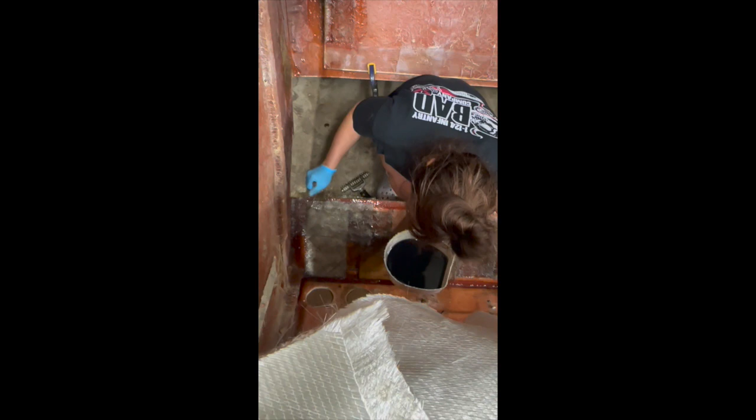Fiberglassing the back of the console where the electronics go. The inside? The back? That's where the electronics are going to go. Yeah, the inside. Yes, the inside. Came out pretty good. The whole thing's coming out pretty good, actually.

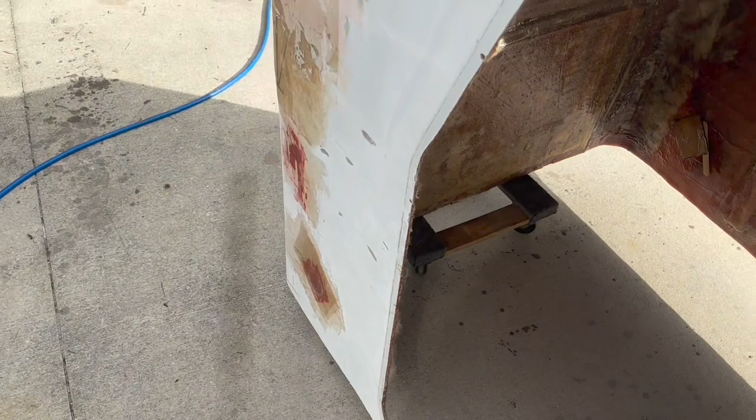Well, what we're gonna actually do is we're gonna do all this white piece here, and we're gonna put gel coat on it and everything that's flat. So like this stuff here is flat and all this other stuff. So we're gonna go ahead and make that. Then we're gonna get that gel nice and thick on this center strip here, and on this stuff, giving us our first coat.

Once we get the first coat all over the whole thing, real thick, we use a thing called a gel coat gauge, which will give us the mils. Never seen one. This is one that U.S. Composites sells. The same people that do the dump gun. So basically, how that works is you just put the gel on. There we go. Put the gel on, and then you put this so you get low. And I'll show you guys when I do it.

But you can kind of see the mils on there, and then you can see how it's stepped. Once it gets gel on it, that will tell you how thick it is. We are going to try to put a thick coat, probably 10 to 15 on there, maybe 20, because when we sand this thing, I want to sand it once and done, and then fix the imperfections. The only thing I'm really worried about is back here.

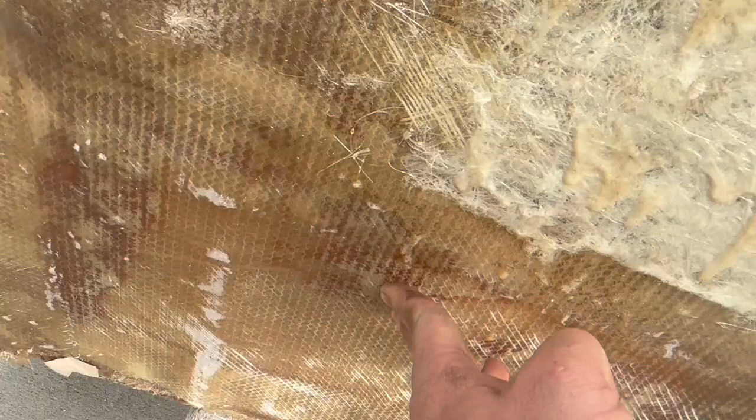I can already tell this is going to be a soft spot here when they try to build that up. We may not gel this piece. There's a flex in it right here. I fixed it up here, so I'm going to have to cut another hole right here like I did before. Fill this with resin to get it stiffened. And then I want these radiuses to be built up like the other one.

So, don't know what I'm going to do with this. I might flip it over when I sand the inside, because we're going to finish the inside of the console as well. Get it sanded, my popsicle sticks cleaned up, and some of that goo cleaned up there, but just get it sanded and prepped, because once I finish the inside and put the electronics and all the wiring on, it's gonna look great, and I want it to really stand out and be like a finished product versus this.

It had the carpeting on there before, so may throw a few stiffeners in right here. This is pretty stiff, but I don't know. We're definitely probably gonna stiffen things up. This is stiff. This air bubble here probably needs to be cut out, but I'm not really worried about any of this. This is actually very solid. Once I glass it to the boat, we'll be pretty good, I think. There's tons of glass on it, tons of 1708. Even though there's air bubbles, it's all here pretty good.

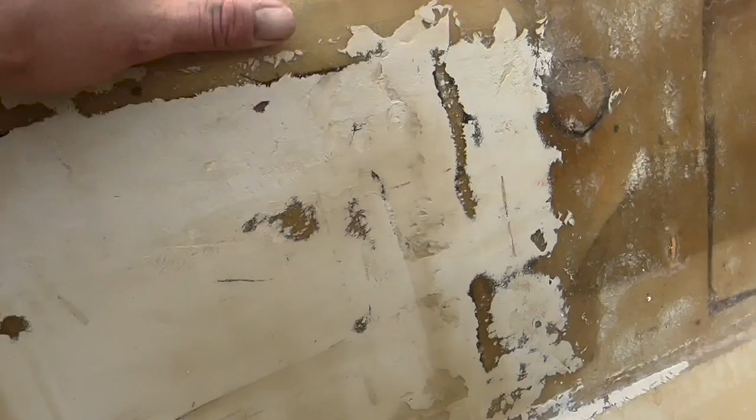We had some bad layups, some old glass that we started using, which I wanted to get used on the console versus the boat anyway, so. It came out very good, I think, actually. I'm pretty happy with the smorgasbord of different pieces that we've put together, and actually made a console that's much different. So I'm super excited to get it all put together. So with that, I'm going to mix this putty up, and we'll go from there.

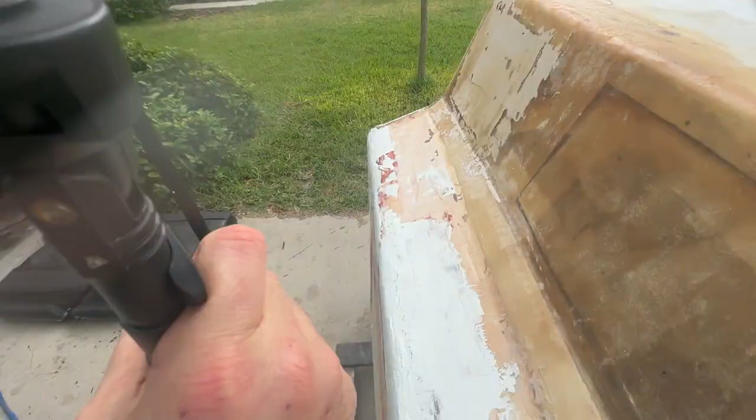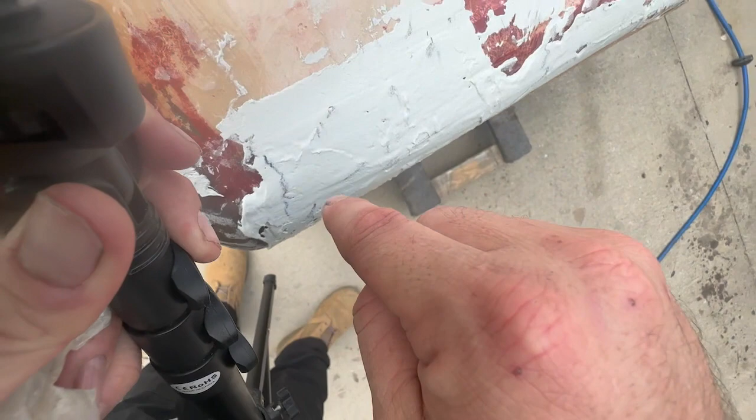So you guys can kind of see it. This fairing compound is fantastical. I mean, it has built all this up already. You can see where the big spatula misses. What I'll do is I'll get some more fairing compound and bring it this way along that, come down, and then I'll be able to make these fillets, which is what this thing is. So you can kind of see how it built it up nice, or there are big ruts in here. We'll get this done, and then we'll get it going.

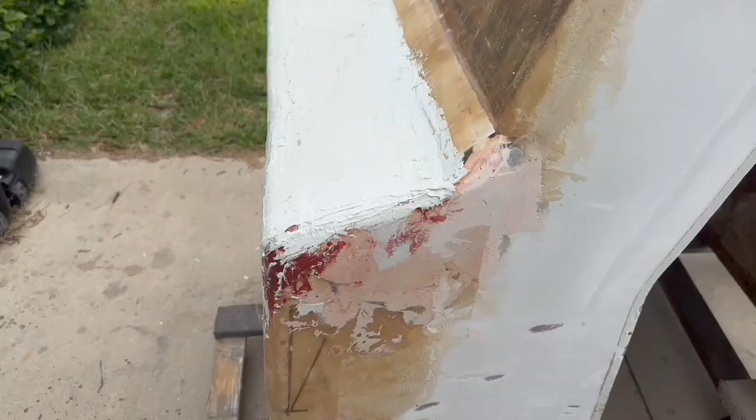See how easy this stuff kicks. I'm gonna fill this side because you can kind of see the divot, and it's not perfectly round. So I'm gonna round this corner. At the same time, if you look down, there we go. You can see the dip right here, and another one right here. The other stuff looks like I filled in really nice. This came in good, but you can see there's a flat spot here, which I probably could shave down and get it to where I want it.

You can kind of see it better from this angle, the flat spot right here. So I'm gonna build that up a little bit more around that corner because you can kind of feel it. And then sand all this stuff smooth. Not smooth, but with 80-ish. Get away from the 36, 40s. And then we are going to paint gel coat on it. Excited. There she is. It's time to get to work.

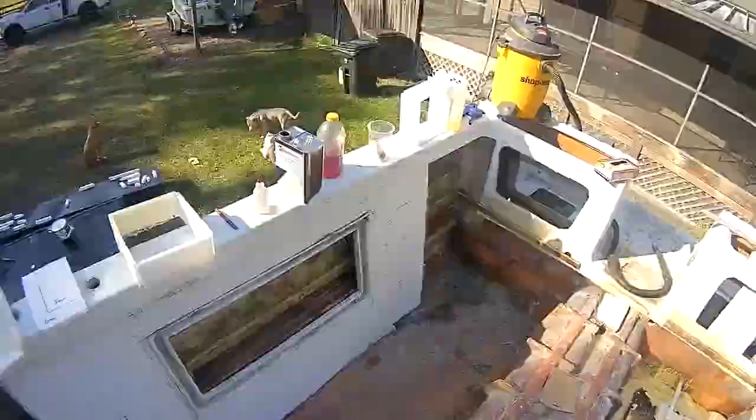All right, so here's what we got going on now. Today, I have patched the tank. I patched this tank right here, where my son dropped it. So we've gotten pretty far. The main goal today, because it's the only day that the sun's out and it's probably gonna rain tomorrow, was to get the foam in. And we've actually done that. So I think I'm almost there.

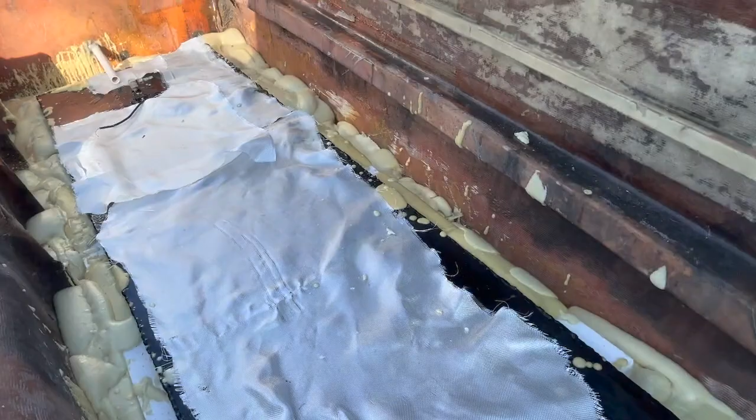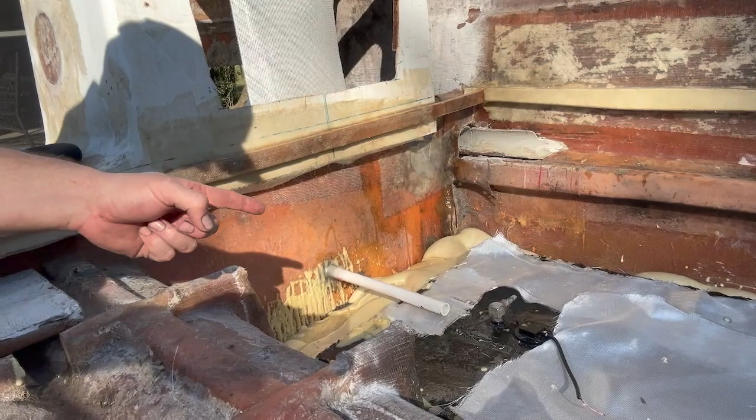It's all got to be about that high right there, which it will be hopefully when this expands a little bit more. I might have to do one more cup just to get it all the way up to the top. What I've done is I installed the drain. So this right here is the drain. And that is going to be for the box that goes over these right here. So we'll get that stuff in there.

Today, before I leave, it's only whatever time it is, but it's winter time. So before I leave today, I definitely want to get the glass down. I'd love to get this thing kicking for tomorrow, to where the next stage on this side of the boat is nothing but boxes, fish boxes, and then floor pieces. So that would be a phenomenal thing if we get that done.

But it all goes down to getting the foam in today and then getting these pieces of glass laid on there. And then we'll move on to the little stuff. Everything's time-consuming, but this is pretty time-consuming to the point where I have to get the stuff put in there and let it dry, and then kick it, and then dry it, and then build upon. So it's going to be built in layers. We're just gonna go from there.

I'm doing one side of the boat, so if I mess one thing up on one side, I can correct it on the other side. That way I don't have to correct twice, just correct once. But I think that we got a good solid plan here today, and it's gonna work out.

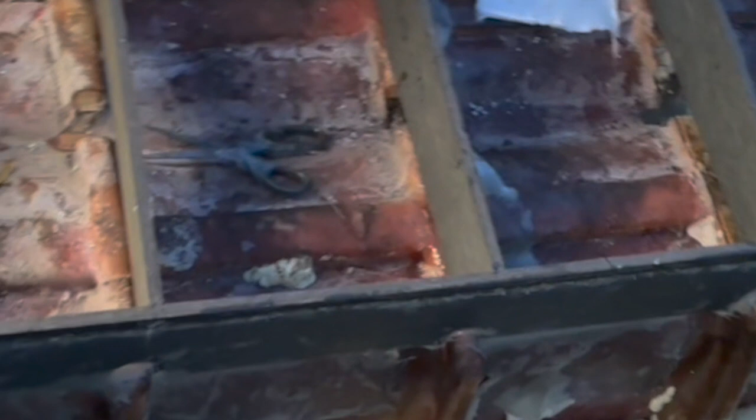But I pretty much have these stringers put in. I did a huge layup on this side of the boat, all the way down that stringer. It's really hard to do these big layups by yourself, so I've got that one put in, that one, and all those ones put in, tabbed in. So as soon as they all harden, it's not raining and I can move this tarp, we'll be able to do the rest of the glass work, because the big layups with 900 mils of resin just kill you under this tarp. The face is burning, I got to get out.

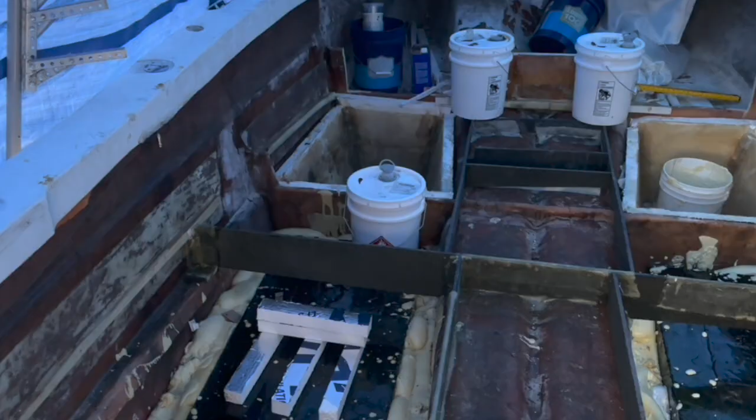So yeah, that's pretty much where we're at. We have gallons of resin left to do the floor. I'm going to add one more set of stringers here and here. They go all the way across, and then that should take care of everything from there. I may add one stringer right here and right here with the bulkhead. So I'm gonna add a bulkhead here, and maybe a stringer here and here, dividing that into two hatches, which I'll have access to via another recessed thing.

So we'll see. I got a lot more to do. It's all evolving as I go through. Like my buddy Joe says, definitely not gonna have this thing done by February. So just rolling along. We'll see how it goes.

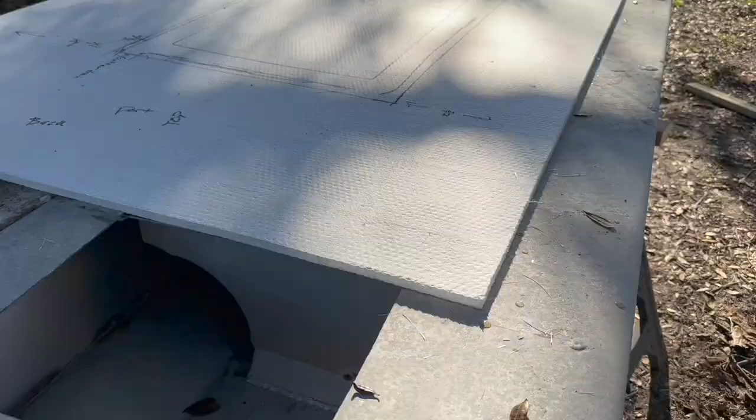Signing off. So here I went ahead and drew that hatch out that I put over there. I'm going to trim up. So that one, I went and drew it out. And here's kind of how I'm thinking I'm going to do this. So I've marked this panel as the back port side. So the front of the panel is going to be here. This is the top port side.

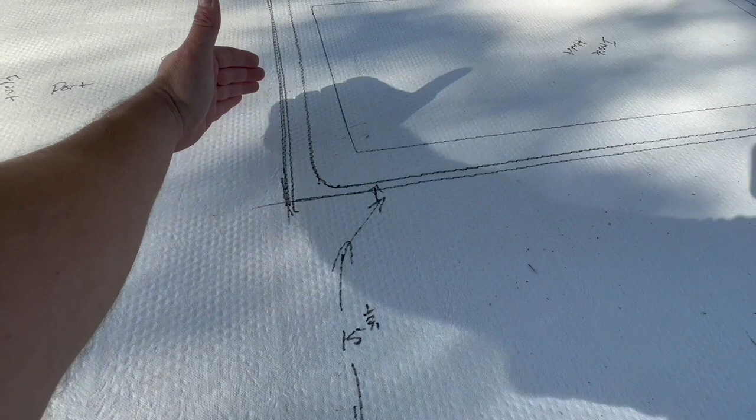The measurement from the hatch to the side of the boat is going to be 15.5. So the hatch is going to be sitting more to the center of the boat. From that side, it's 10.5 inches. I didn't center it because I wanted it more to the side. So when you walk around, this is open and flat.

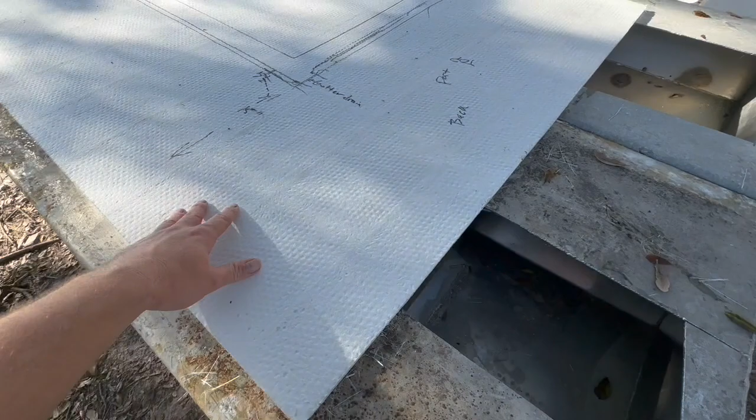Gutters here, which I probably am eliminating the gutter, but I don't remember if I'm going to do that or not, because then I have to cut this out and make a gutter going all the way back to the back of the boat. What I think I want is for the hatch to sit flush with the floor, so it runs out the back, or just make its own little gutter there, and I'll glass it in the bottom, and that's where it'll go. And then the hatches will drain under the floor type deal. Don't know how that's going to work.

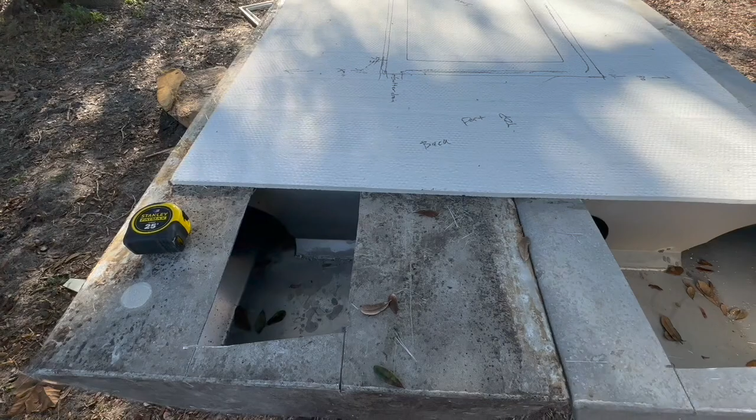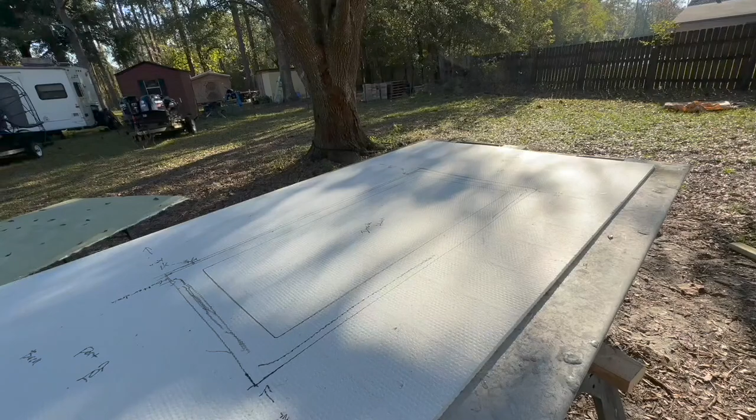And then back port top. So 10.5 inches from the center of the boat, 10.5 inches from the back of the boat, or from the side, 15.5 inches from the center console. So the panel, as the boat sits over there, the panel's actually backwards. It's going to turn this way. So we'll see how it works out.

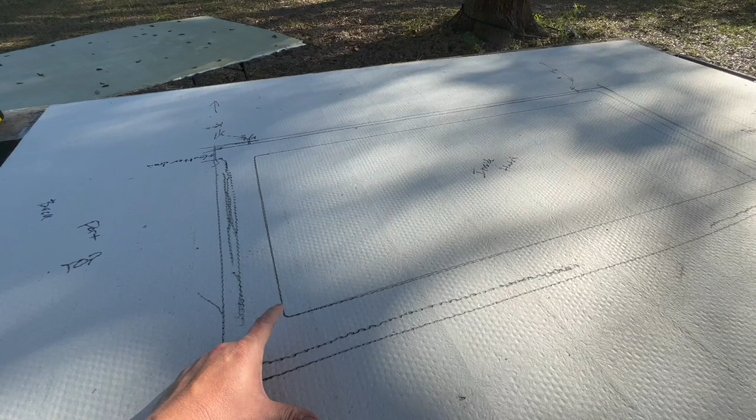What I'm going to do now is I'm going to cut this around this inner edge. So this here is the width of the gutter. And I'm going to go to the center edge here, cut this out. This is the hatch piece. So I'll make the new hatch out of that after I tear apart the old one and get the old wood out, depending on if it's composite or not. One of them is rotted and it's rotting, so I know it's gonna have to be replaced. So let me get to cutting, and hopefully I don't mess this up. I bought an extra piece just in case I did, and we'll go from there.

All right, so here's what I've done. I went ahead and cut this out, so you can see it fits out nice in there. There is a huge gap on the other side, but I'm going to cross that bridge when I come to it, since I'm reusing the hatches. And I'm not remolding hatches out of this other stuff.

So I've traced around. I'm gonna roll this into the gutter because I need this to be strong so it doesn't flex or break or anything like that. So I'm gonna cut this out. This is the inner piece. Reuse this for the hatch. I've got my other piece over there for the other hatch, like I said. And then I'm gonna wet this out and put it down, and then it'll be panel number 2 for like this. So hopefully we get this done. I'll jump in the boat. I'm gonna finish the tabbing and stuff for that, and then we'll go from there.

He's the only one who gets to use his 3D printed mixers.

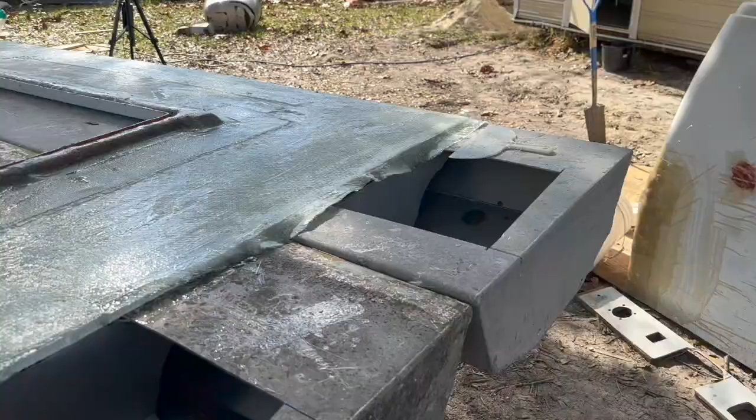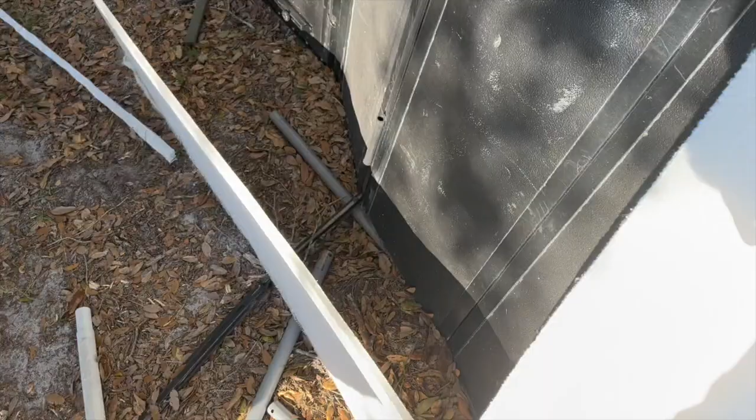So what I've done is I've measured this stiffener to here, which is about 38.5. I'm gonna cut it right on this side of it, and then I am going to stick that on this floor panel. Now the reason we've done that is because the floor panel needs to sit flush with the top of the stringers and bulkheads, and if this was too long, it would sit on top of that and it would be a big bump in it.

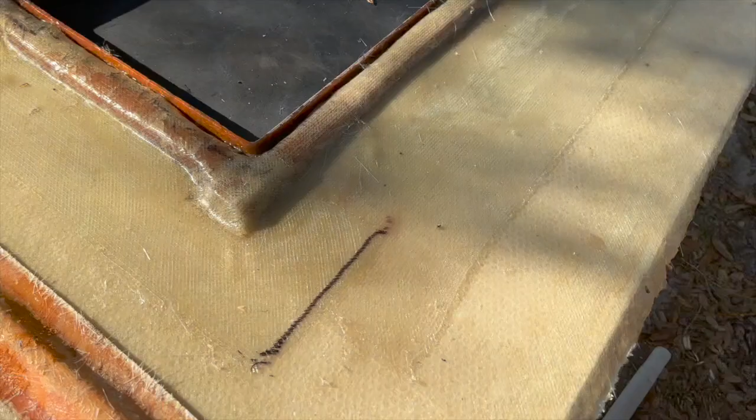So cut this down, cut that down, and then from there, I'm gonna take this, big thick panels, and I'm gonna glass it into the sides here and here, and this panel will be very, very stiff. And I think that will be plenty enough to go ahead and throw this panel into one side if we need to after we gel coat, along with the other ones. So we're very close to putting this floor in.

I think I'm not gonna rush to put the floor in because I also need to do these fish boxes and do the live wells and things like that. So once the fish boxes are done, live wells are done, we'll start to work our way forward to the next layer of the boat, which is gonna be the floor. So we'll put this in. Hopefully the phone doesn't fill up with storage. I'll try to time lapse it and we'll go from there.

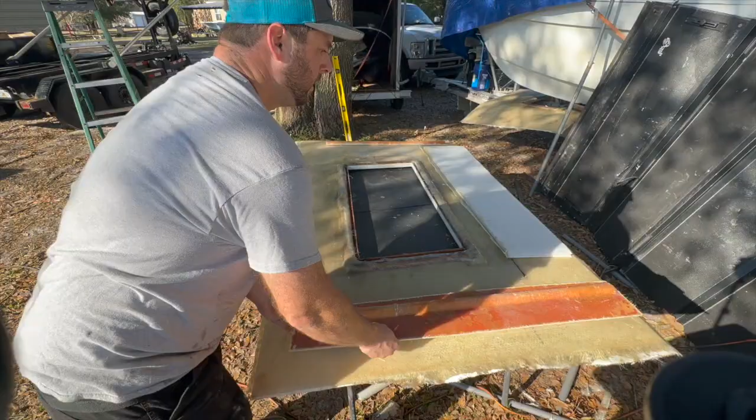Very itchy tomorrow. I don't like it. I like that much better.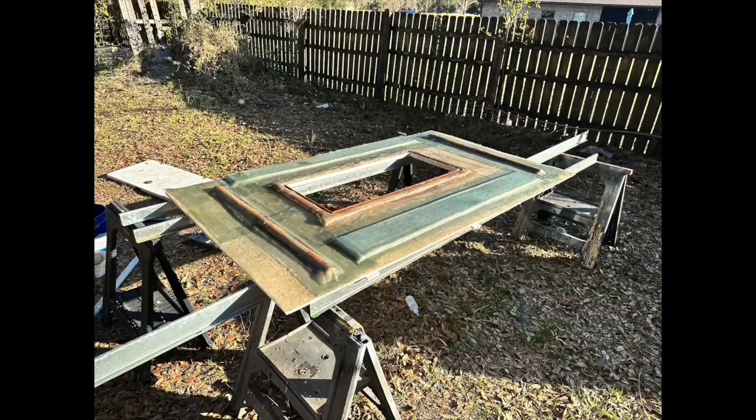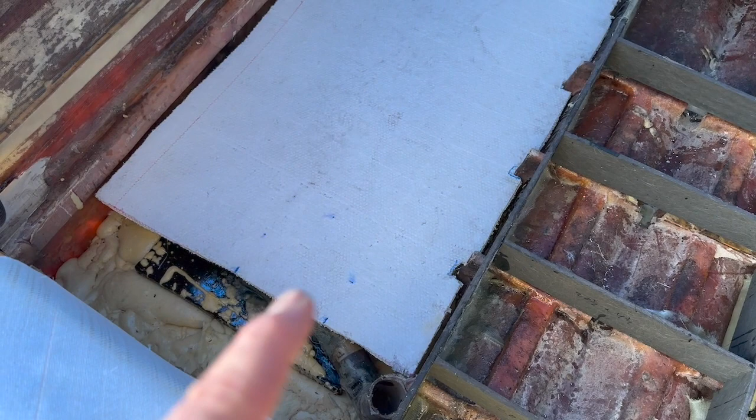I've gotten a little bit done. So before I started filming, I was able to get this box completely fiberglassed in, as you can see, right there. So it is strong. Just lay down on top of it. And then what I'm going to end up doing is cutting the hole here and then fiberglassing the Coosa down around it so I can put in the piece for that.

And then I'm also going to end up putting the drain in this side today so that I can get the back wall put on with some more honeycomb. Honeycomb is easy to work with. I only have a little bit of Coosa left, you see over there, so I'm going to try to avoid ordering another sheet if I don't have to. I wanted to use the Coosa for the structural supports, which are all these.

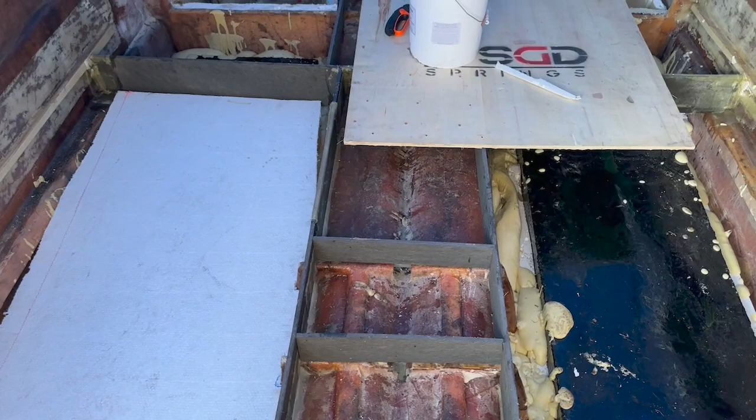All the tabs that I put in to keep everything down are hardened. So the stringer system is now put in. Now we'll go back with 3 layers of mat, or 3 layers of 1708, this stuff here, on each individual piece. And then my very last thing I'll do is put a stringer back here from about right here across, which will support the floor back here. The sides of the boat are going to support the floor.

Well, this side here, let's see if I can get focus. This side here is going to support, and then this here is going to support the floor as we go across. And we'll have this big fish box in between. I don't plan on putting any sides to the fish box, just glass, and glassing it to the sides of the boat. I may end up going back and creating a little void to kind of insulate it, but that'll be for another day. Right now I want to get the floor glassed in and then curing.

Everything under there is good. I didn't pour any more foam, but with the rigging tube and everything glassed and curing, I now can put this piece in. I've been going slow to make sure that it all works.

If you're doing this kind of work, if you don't have one of these electric scissors, I got mine from Harbor Freight because I needed it early. They sell them on Amazon. They sell a few different types. This is a great piece. Phenomenal. Highly suggest it. Don't go anywhere without it. It cuts nice clean lines on your fiberglass, and it's a lifesaver.

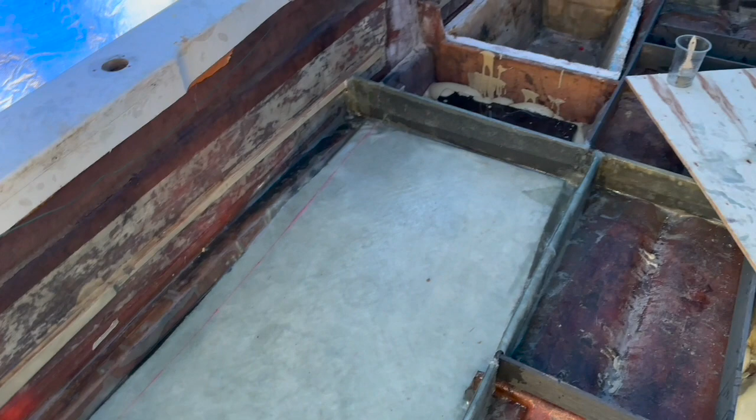we have these stringers on this side glassed in, and the floor of the box initially glassed in. I'm about to die in this tarp, so I'm gonna let her go for today, and come back tomorrow, cut up some more glass, and lay another section in there. These big layups suck. They're very hard to do. So plenty of structure in there though. All the contact, everything's sealed up and glassed in, and there's probably a quarter-gallon of resin in the whole thing. So we're good over here.

These stringers, I'll do one more. Plan on doing one more layup in each one of these for this side, and then it'll come down this side too, back over. So after that, we'll be ready for drains and fills, and like I said, I might try to put some foam in there. I don't know. We'll see. So come along. These are killer days.

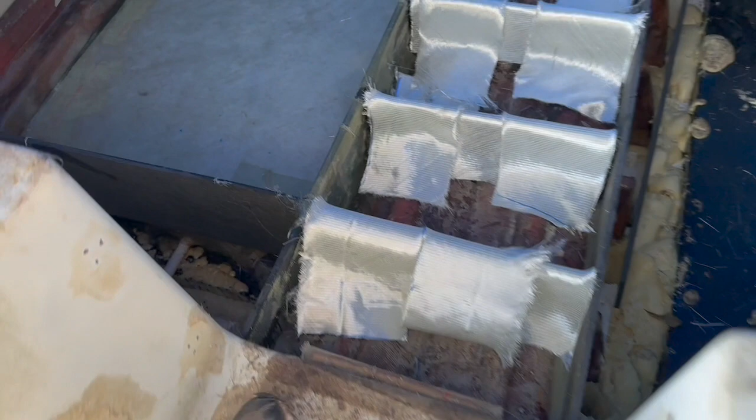The next day. All right. So as you can see here, we had a very good cure on the fish box, layer 1. I'm gonna get another layer in there, maybe today, depending if the baby stays sleeping. But I'm gonna try to get these in today and drying for tomorrow, because she's really coming together now, and I'm pretty excited. I have decided to drill a big hole in the middle and fill that with foam as soon as I cap off this end piece.

So I'll be doing that here soon, and then I'm gonna insulate the back here with another piece of foam from over there, and that way I will have a semi-insulated fish box, because the sides won't be insulated obviously, but I might try to slide in some foam there, but we'll see. It's coming together. So we will be back in a minute and go from there.

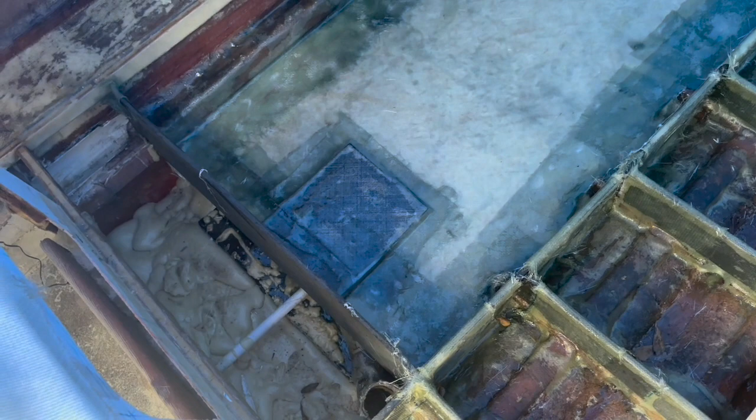All right, quick day today. Only out here for about an hour and a half or so. So here's what we've done. We have finished tabbing in the box. So that's all she's gonna get. She got 2 layers around the edges, and I glassed in the Coosa piece for the through hole, or little screw-in deck plate. That way I can access the rigging down there for the fuel pickup and the fuel sender, and that'll be accessible through the top of the hatch.

And we've got all that put in. It's easier now to walk over here. At least I can trust my tabbing in the sides, so that's all good. We're rocking and rolling. I'll let this set up, and then tomorrow, I didn't bring my tools out today because I was just going to do fiberglass. I'm going to cap these and throw in that foam that I need, so that we can fill the bottom up a little bit with some foam, get some supports in there. So it's all coming together. Not a slow day really, but just a day out of the life of rebuilding a boat.

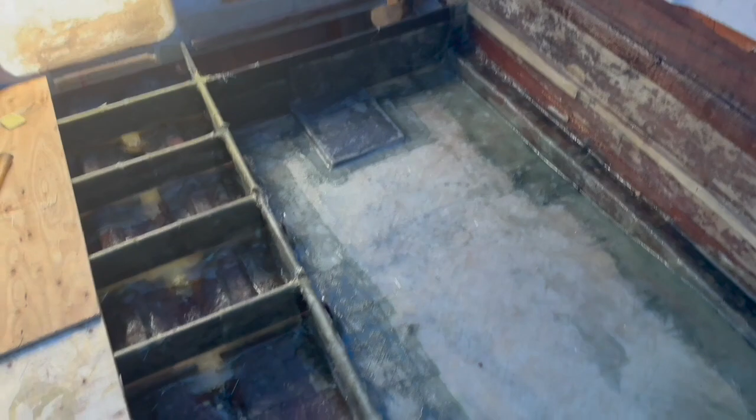I think that it's just coming along, you know, there's not really much else you can do. Can't go any faster or any slower. The resin dries. I mean, if I had a full day today and my wife didn't just pass the real estate exam and I needed to get home, I could probably glass in all this.

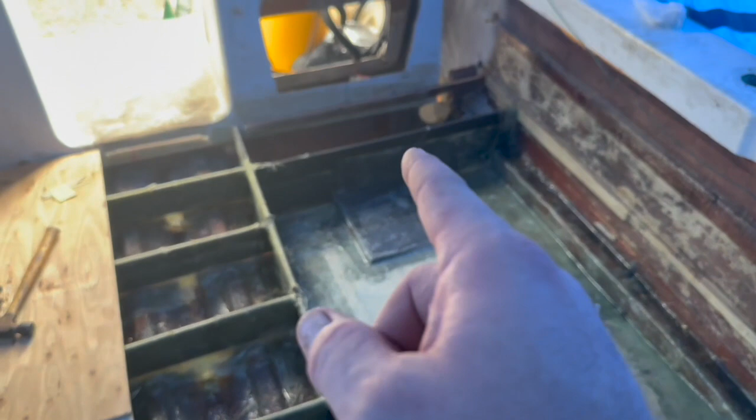If I had the tools, I could cut this and glass that in, cut that, glass that in, cut the hole, pour the foam, and then work my way up to where I would glass this piece in, which I'm gonna do to make that a bottom. And I'm gonna take a piece of that board and make a bottom there. And then this will be some sort of hatch. Even though it'll have this stuff accessible through a through hole, there'll be some sort of hatch here that I can get to. And just put your cast net down in there, or whatever down in there. But,

I mean, now that it's all coming together and it's all working, I honestly think that I can start to plan, because it's not going to change very much. This side may change a tad bit, but no one will notice. Box will be the same size, hatch will be the same location, and everything like that. So this side will probably stay the same, but over here was like the trial run, and it came out really well.

So with all these things, people were asking about the cap, because the cap creates structural strength as you come down. It's glassed in right here. So with this tabbed and fiberglassed in here, fiberglassed in here, fiberglassed in right here, there's going to be another fiberglass piece here, and then more fiberglass up here. The hull's not going to go anywhere. And then on top of that, 10 inches above this, the floor is going to be glassed in across the boat too, with large pieces of 1708. So the cap is going to be very rigid.

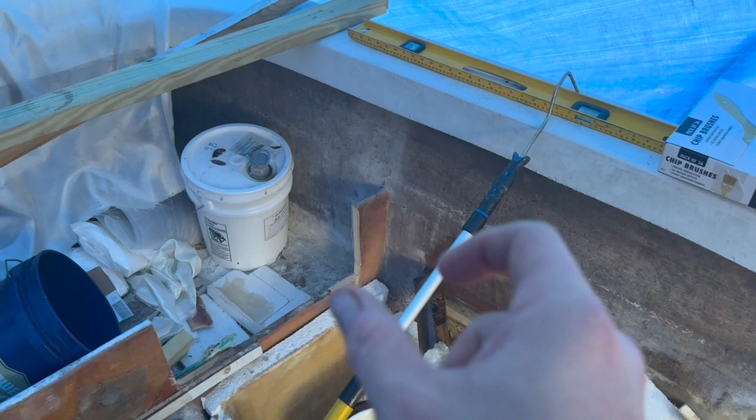And then on top of that, I'm going to build support sections for the cap that come from the floor to the cap for cap supports, cap rail supports. So I'm going to be able to run a lot of rigging and a lot of tubing and a lot of things through the floor and have the boat be just as structurally sound as if it had the cap on.

I was sitting there last night thinking about what I could have done differently, how I could have done it easier myself. And then I was thinking, maybe I didn't need to raise the floor up. I could have just cut this out. But then I thought to myself, no, because the cap here, this whole piece, if you were to look at the engineering designs, I bet there's a lot of structure here, back here, especially with the motors. So I'm glad that I didn't just cut this out and make this thing sweep all the way out the back. I'm glad that I kept that and I raised the floor.

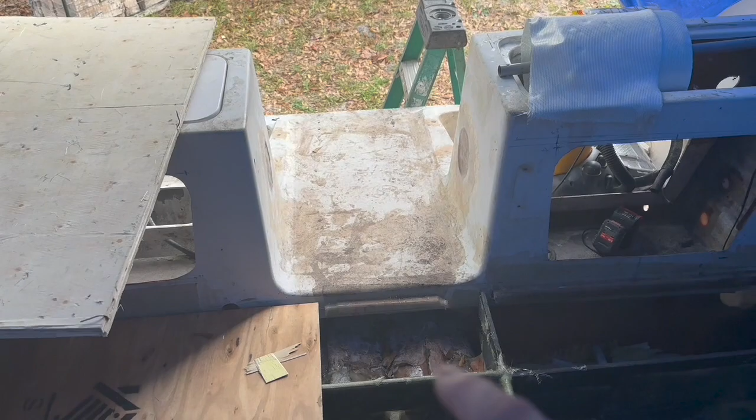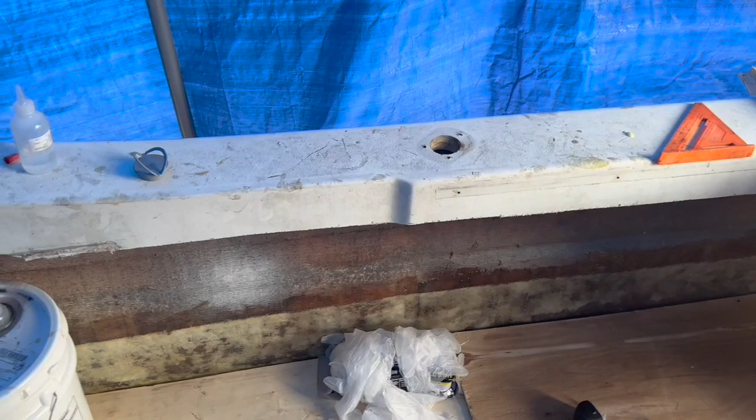The other thing is, if you look at my feet, the floor only came up about ankle high because this is 1/2-inch plywood. I mean, this is a substantial amount to the kick well, or, I forgot what that's called, but this piece, the cap rail. So you're going to be able to reach over this boat and get into the water and do your hands and everything a lot easier than you could before. And then look at that lineup, man. It's just going to go, and then no scuppers, clean deck right out the back. I'm going to have plenty of storage in the floor.

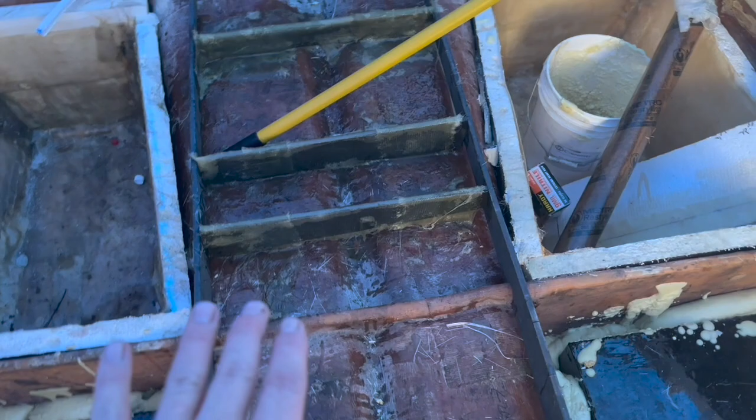The console is going to come to about here, so I'm going to probably cut one more piece to go across there to support the console. The front of the console is going to come there, so I have all that walk room up there. And then the back of the leaning post, I believe, comes to this. So console, leaning post right here above the tank, center of gravity. It's going to be great. Lots of walk around room.

And then I'm going to have lots of storage, like small storage within these sections of Coosa. So nothing's going to really go here. Don't think foam's going to go in there. I was going to put foam, but I doubt I'm going to do that. It's just going to be drilled through and let it drain. But I'll probably have one floor drain in there to where something comes in.

But I'm going to build that custom leaning post with the cooler stand and everything. Like, it's going to be great. I'm super pumped, super excited. It's coming along.

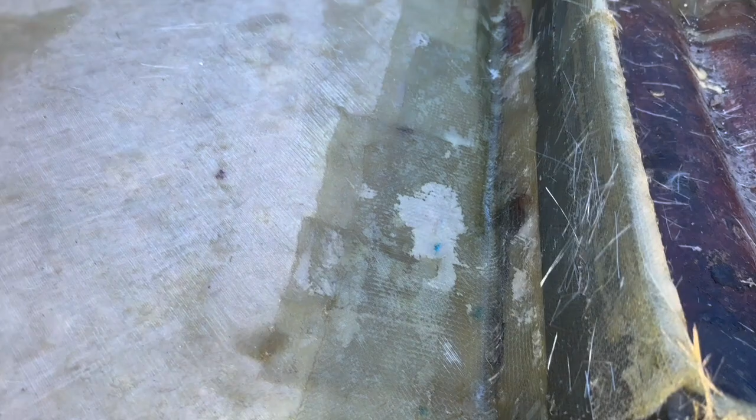All right, back here at the boat. So over the night, we had some rains and some water got in, but it's hard under there. It dried cloudy in some spots because of the water. So Coosa is in there, dried nice, cured good. This box is sturdy. We have to do some more supports, which I've done today, because I'm capping off this to make this little hatch.

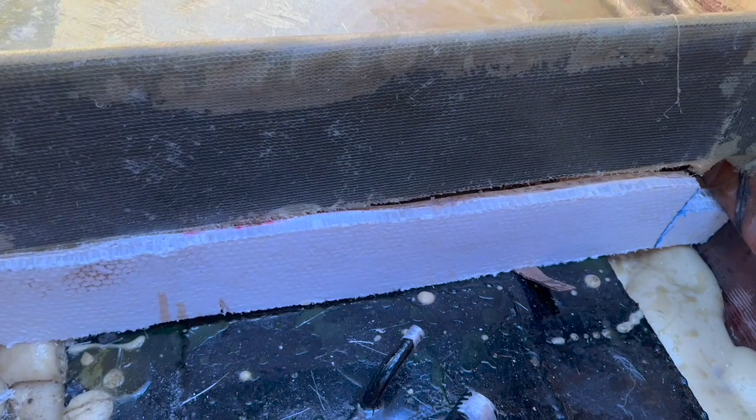So I put 2 pieces of the foam core together, and then I'm going to cover that with 1 piece of glass, and it's going to come down. It'll seal over here, and it's going to seal down, and that's going to seal the tank part right there, so no water can get in, and that's the big thing. So I'm trying to make it to where all the foam that's behind these 2 walls under this box cannot be gotten to by water.

The tanks, I'm confident in the tanks. Tanks have so much sealant on them and everything that, if they leak, then I gotta rip this whole boat apart, and that would be miserable. So they pressure tested, so hopefully they stay good, and we can go from there.

I think I am going to get some foam for over here, and I think I am going to line this. I haven't decided yet, but I may, because I want to hide those knees in the box just to clean it up a little bit, and then bring this side out a little bit. So we'll see how it all goes. It would be a disservice not to do it right and finish it up right.

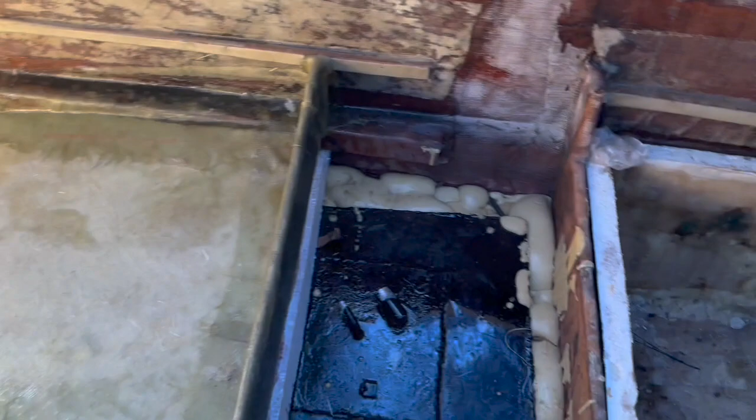But anyway, box is in. Today I'll have this finished. I'm going to cut the hole in here and fill that with foam, get this thing started, fill that back there, and then start on the floor piece. So don't know if gel coat's going to go in yet. It probably will. I don't see why I can't put finished wrap in that right there when I do the other piece, and then throw some gel coat on here after I cut that.

I don't know, but we'll definitely see. I'm trying not to get ahead of myself, so I have to redo stuff or mess anything up. So if gel is the next step, I'm sure I'll come to that realization very quickly. So probably rambled on enough. Starting to get cramped in here. I'm going to start throwing trash away and putting everything back together.

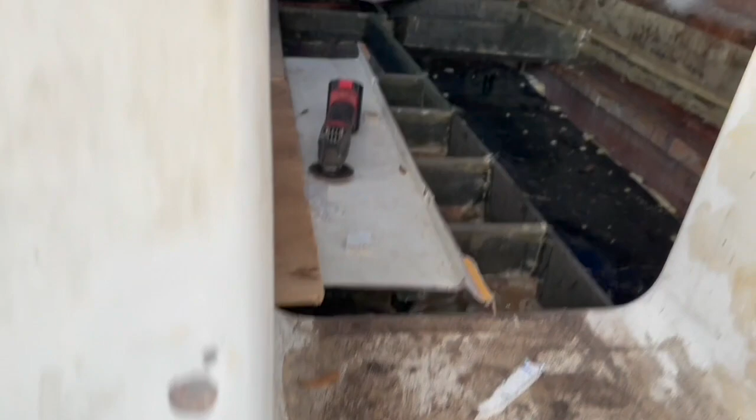All right, kind of a late day today, but here's what we got going on. So this is the box for the right hand side. So yesterday we got it all worked up to where this side of the boat is done. Now we're gonna move on this side. Well, it's not done. Still gotta do gel coat and everything else. But I'm gonna gel everything at the same time. So we're working on the fish box for this side.

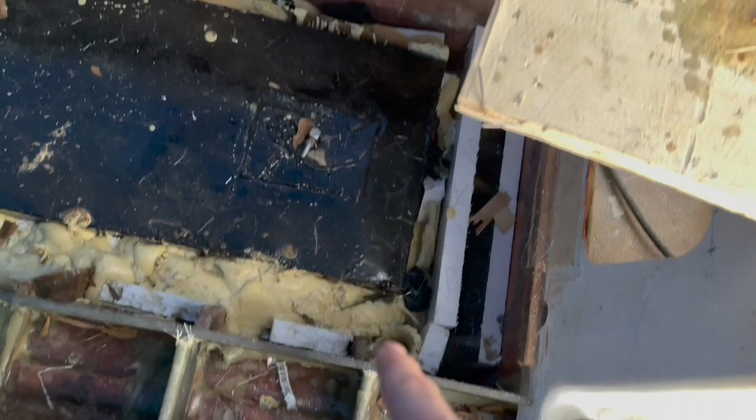I've got that piece cut out. It's gonna go right there in the front, so right here. And then I have this piece of board that's going to be glassed in here with another stiffener on the bottom made of honeycomb, because that's what we have. And I'm out of Coosa, and I'm not gonna buy another $177 sheet. So, foam's in. We'll pour a little bit more.

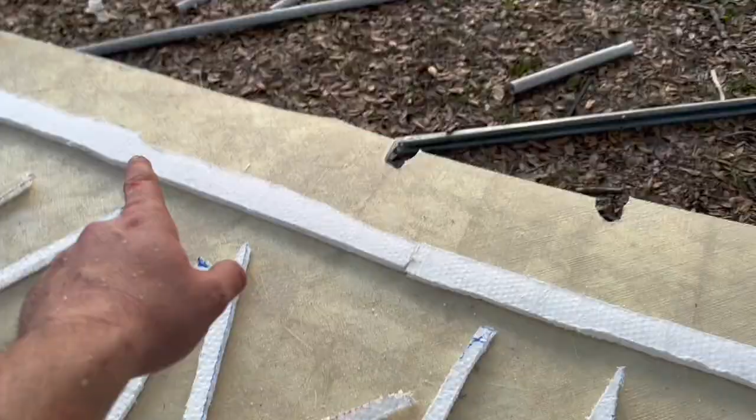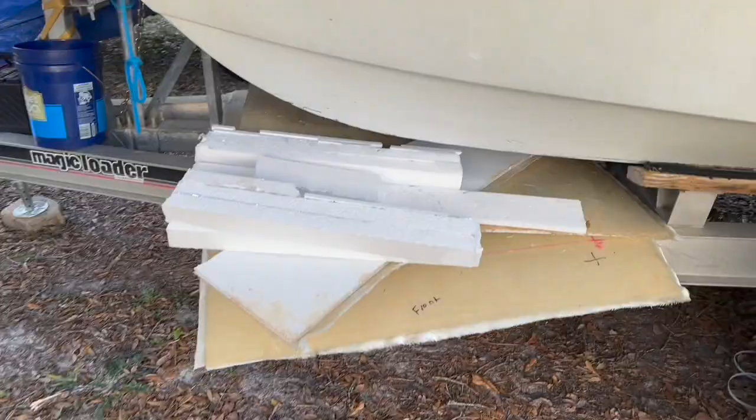So what I didn't like about the other one was this piece didn't stay straight. So we're gonna glass these stiffeners in onto it so it stiffens the board up. Throw some more 1708 on the back, and then glass it all in at one time. We'll probably glass it down here, take it up to the boat, and put it in. So we built and glued all of these. So there's 4-inch here, this is a 6-inch here, and a 5-inch there to go in the middle. And then this will sit on that, giving me the slope that I had on the other side.

So this part of the box should go in tomorrow. I don't have really much time. I probably could mix it today, but actually, you know what? I think I will mix a little bit, and I'm going to do the stiffeners, and then we will be able to glue the other stuff in tomorrow. But yeah, I can do that. And then be it for today. Not much fiberglassing, but a little bit. So watch this.

All right. Camera died, but it is what it is. Show you what we got done, and then we'll head out.

So we got the box in. We got the first two, so we got the edge there and the edge here. I still gotta do the edge over here. I'll do that tomorrow, and we'll have that box in. I gotta patch that. I forgot to do it before. Actually, you know what? I could probably do that before I leave, but I'll do that later on in a minute.

But yeah, I'm gonna cut a piece that's gonna slide right in there, and basically it'll curve and slide right down in and be patched up right there. And then we got a little grinding to do. I'll shave these little tabs down and sand this stuff, but came out pretty good. Nice flat level. Get the stringer in.

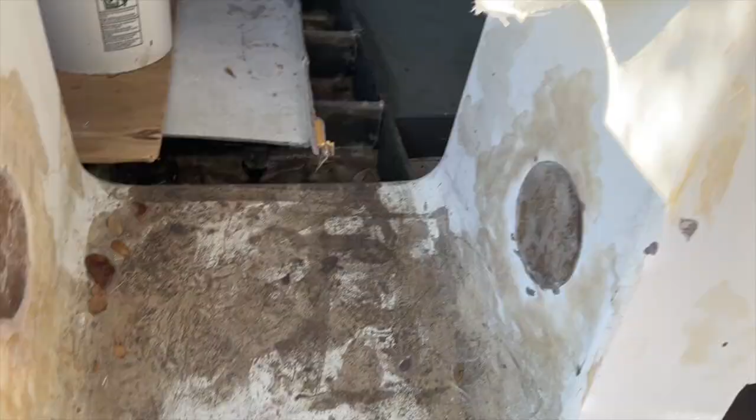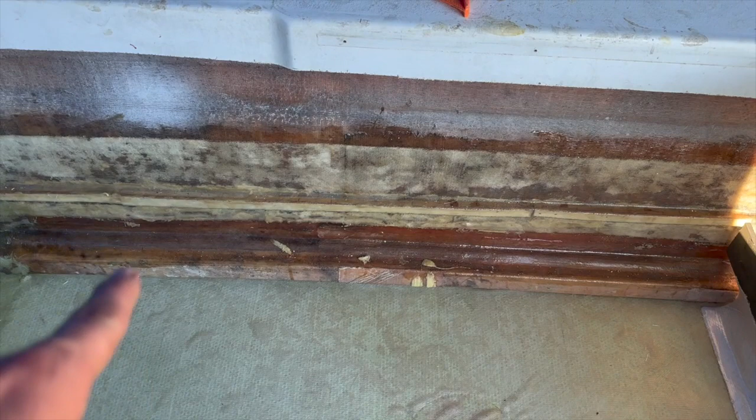All right, guys. So as of yesterday, I cut that and put it in there. So there's a piece of this board in there. Fit the fiberglass there. That fiberglass is going to go there. I'm going to chip off this foam here, chip all that out so that I can get it laid down. I'm going to grind down a little bit of this so that that fiberglass lays down nice and good.

And then we are going to lay the fiberglass in. I built that bulkhead across there. We'll lay some of that fiberglass in as well. I'll get that cut, and then I have to go take the boys to football. So this video will not be terribly long because I only have about an hour to work on this thing.

So I really want to get out from under this tarp. Man, I want to get this boat done. But steadily coming. I've had lots of people ask me to help and things like that, and I could have gotten help, but I'm a glutton for punishment. So just keep rocking and rolling with it. Go ahead and watch this, and I will update at the end.

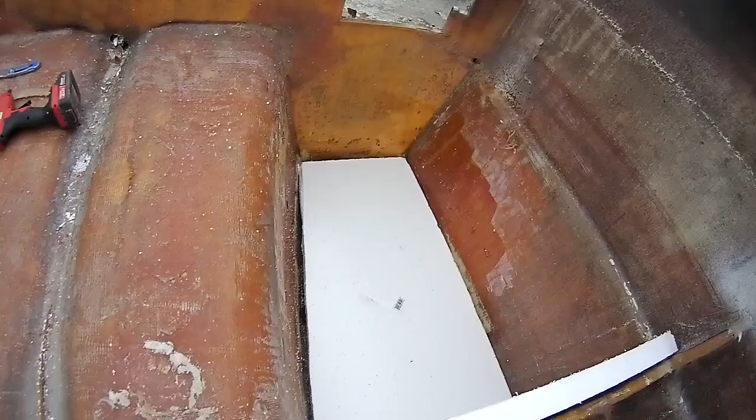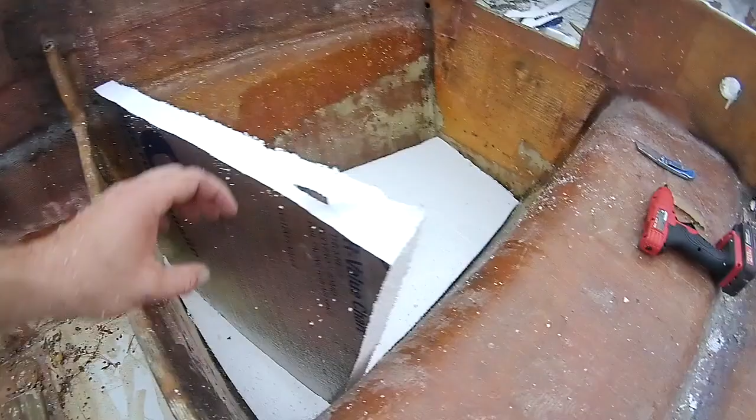Throwing some foam in the fish box, or in the coolers. Props to Buddy Joe. I'm just gonna line these and throw them in. They will be insulated. I got this R value foam from Home Depot or Lowe's. The polyester resin melts it, so I had to buy some epoxy, but it wasn't a big deal. So right now I'm making templates out of this box, and then we are gluing them together with the good old Bauer glue gun, which I highly recommend.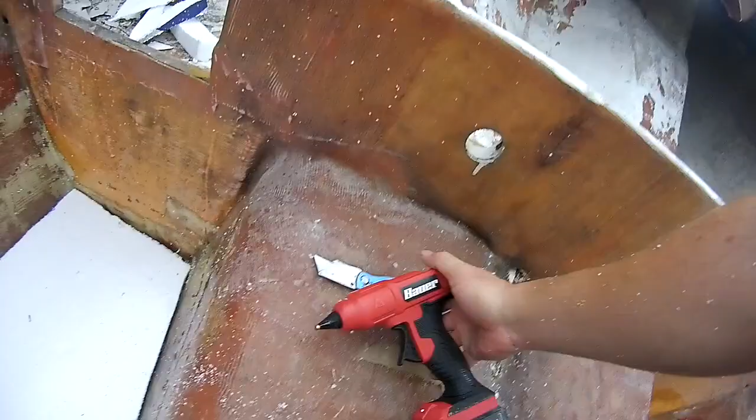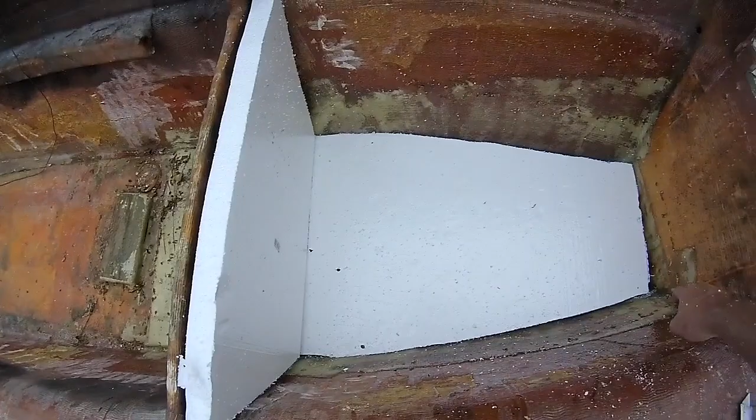It's been great. And then we will probably just silicone them into the bottom after we scrape it up, clean it up, and then I'll lay a bead of thickened epoxy around the sheets as they lay on the top. Lay a bead of thickened epoxy or thickened silicone or something like that. Glue it all in, and then I'll lay down mat with epoxy on it

so that this stuff has a fiberglass core to go to, and then I'll lay layers of Biax 1708 and polyester resin to make the actual box structural, and then the lid and everything will go on top, and the floor. So just keep on rolling.

Alright, so what I did today, I got the fish boxes done. I went and got more foam from Home Depot. As you can see, I put it all in and then filled the gaps with some spare foam that I had. I still have quite a bit in there. This box, a little rougher cut, but all it's there to do is provide some insulation.

I'll get some more foam, put it in the little pieces, and fine tune it as soon as I start trimming it up for the floor. This will get a piece of chop strand on the bottom, and then it'll get a few pieces of biaxial cloth to kind of make the mold good, and it'll be with epoxy. So go ahead and watch.